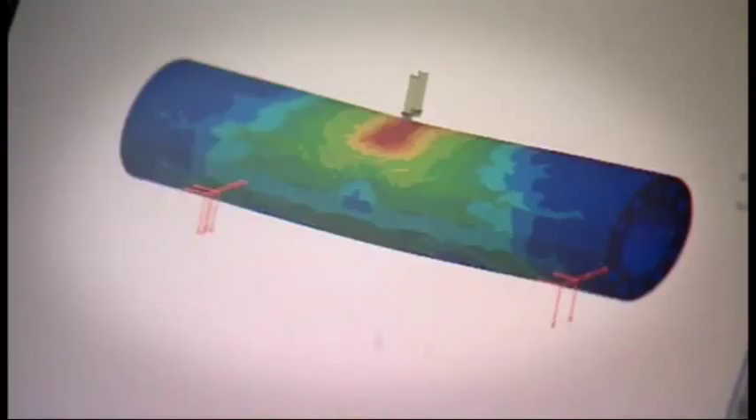It must take a lot of people to plan something like that. Yes, a team made up of industrial, mechanical, and chemical engineers, a city planner, and interior design experts ensure that all components of the building's specifications are met.

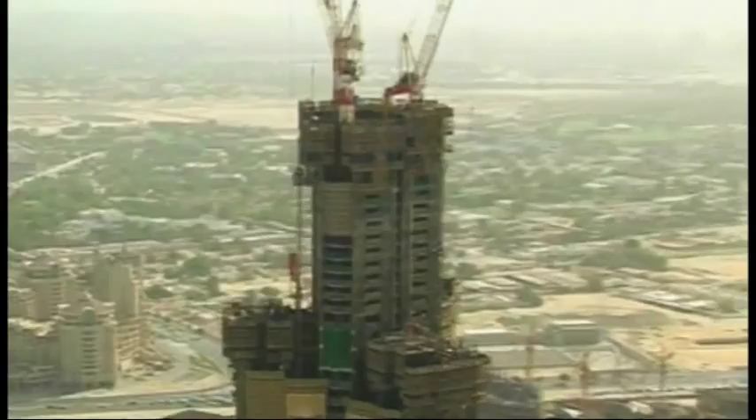In an attempt to bring a new image to the Middle East, planners are creating space and living for 10 million inhabitants. Along a stretch of 7 kilometers, 140 skyscrapers are being built, each one taller than 300 meters. The center of attention in this extravagant plan is a massive skyscraper, the Burj Dubai. Is it the tallest in the world? Yes, it stands 800 meters tall.

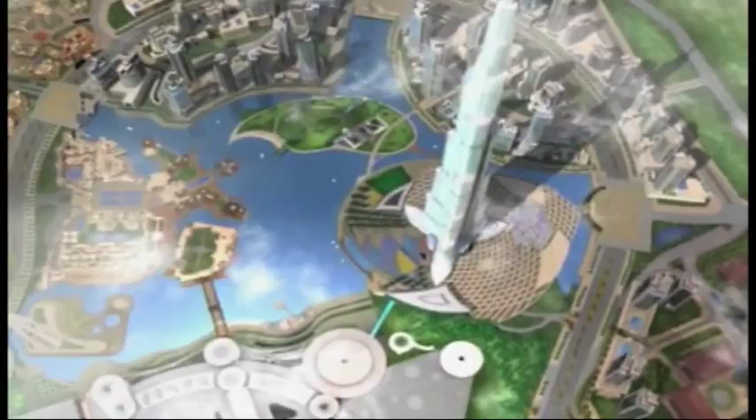And surrounding it is a whole new district with offices, parks, an artificial lake, and 320,000 luxury apartments. There's even an old town quarter embodying traditional Islamic architecture. The goal is to transform Dubai into a service and tourism-oriented city.

Crowned the tallest building with the highest roof, antenna, and inhabited space in the world, the Burj Dubai is the outstanding landmark of the new district. A symbol of architectural excellence.

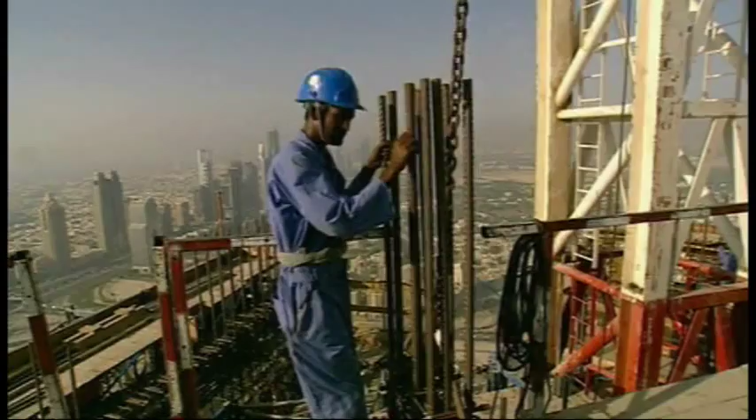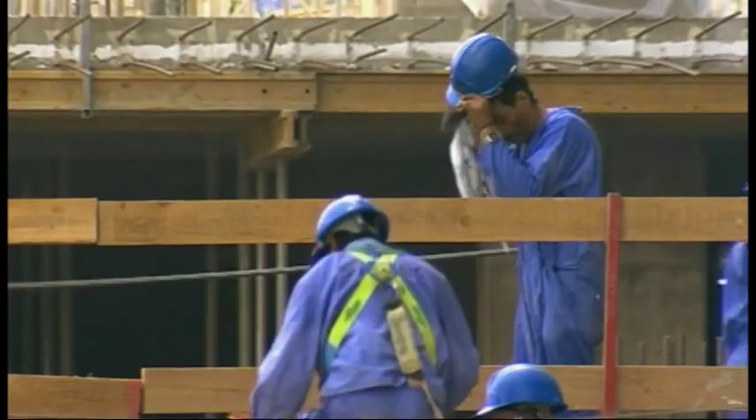The crews working on the towering structure are pioneers in the construction industry. A 3,000-strong labor force from Pakistan, India, and Bangladesh work around the clock in 10-hour shifts. The high temperatures, along with up to 90% humidity, are tough even for those used to working in such harsh conditions. The entire downtown project surrounding the Burj employs some 25,000 workers on the biggest construction site in the world. A quarter of the world's cranes are used.

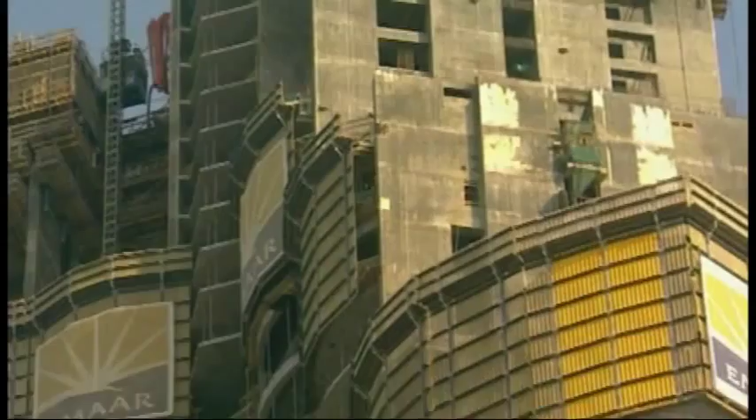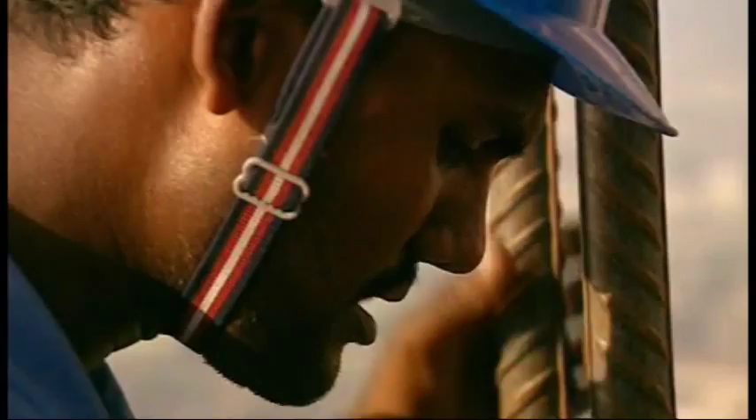2/3 of the Burj Dubai is constructed from reinforced concrete, and never before has so much steel been used on such a small architectural footprint. The steel elements, powerful as they are, are sealed completely by concrete to guarantee that no air or water comes in contact, and the steel must be protected by concrete in case of fire. The high temperatures must have made it difficult. Yes, the daytime heat left them no choice but to pour cement at night.

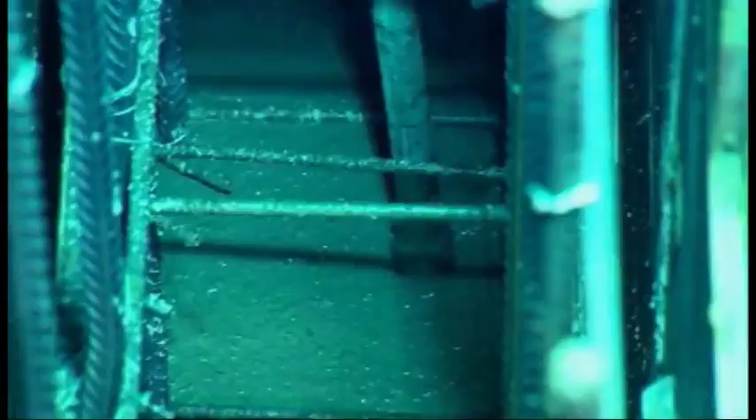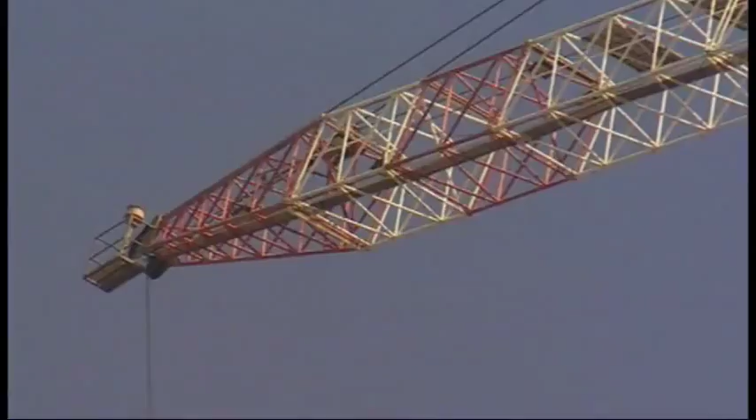In the daytime, imported massive cranes hauled up tons of materials. We have 3 big construction cranes up here. There's 1, 2, and the one behind is 3. These are the biggest construction cranes in the world. One actually came off Petronas Towers in Malaysia. These cranes are called self-climbing cranes that actually climb up inside the building.

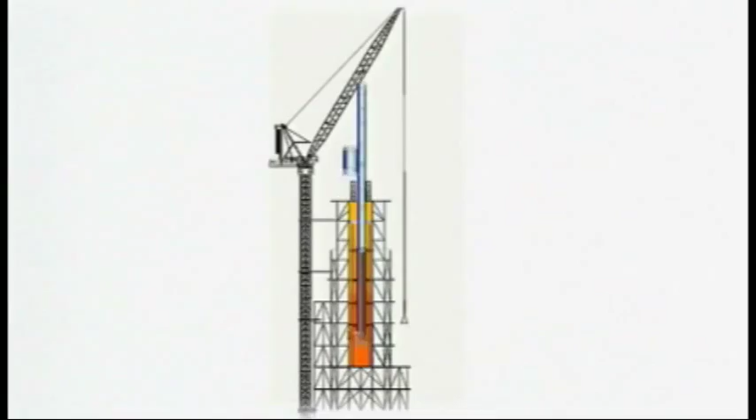These cranes are supported off the walls downstairs at 2 locations with big beams. So what they do is they put a 3rd level of beam here, so it's supported on 3 beams. Then the bottom beam gets loosened, so it's supported on the top 2. And then the crane jacks itself up. It has a big hydraulic jack in the bottom of the crane that goes up like this. And it catches and goes up again, 1, 2, 1, 2, like this. So in 24 hours, we can jump this crane about 20 meters. In the end, 1 crane was left to mount the 200-meter spire that crowns the Burj Dubai.

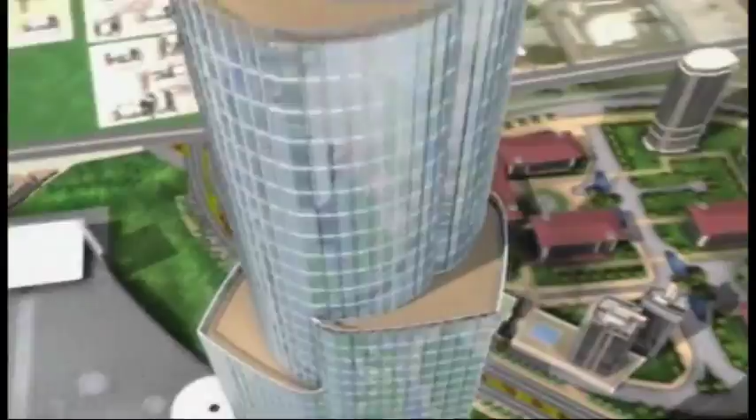For a building of this magnitude, extensive maintenance planning was necessary for managing power, climatization, and water. Every material distributed throughout the building was pumped or driven upwards against the force of gravity. A multitude of pumps, pipes, generators, and distributors service the entire building. Every 20th level is reserved for these logistics. These floors have much higher ceilings in order to house all of the equipment.

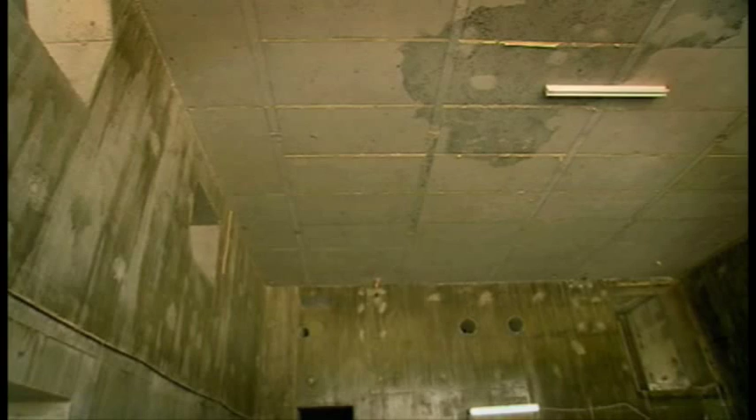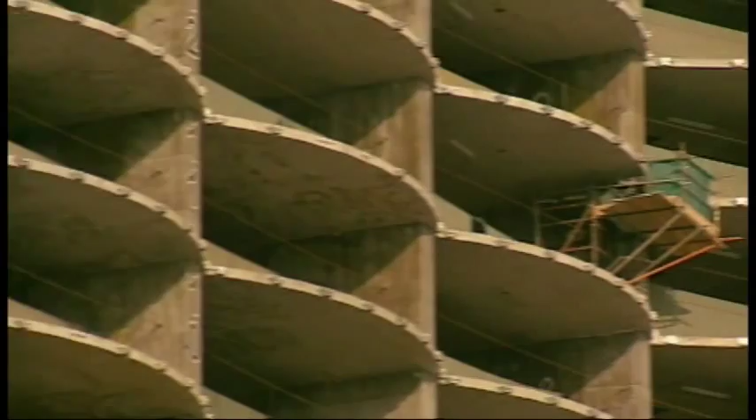For developers, the biggest concern is climatization. A common problem in skyscrapers is that some rooms can be flooded by too much sunlight, causing them to heat up. The cost and energy used to cool a building of this magnitude is huge, as the hot desert sun can produce temperatures of up to 50 degrees Celsius, or over 120 degrees Fahrenheit.

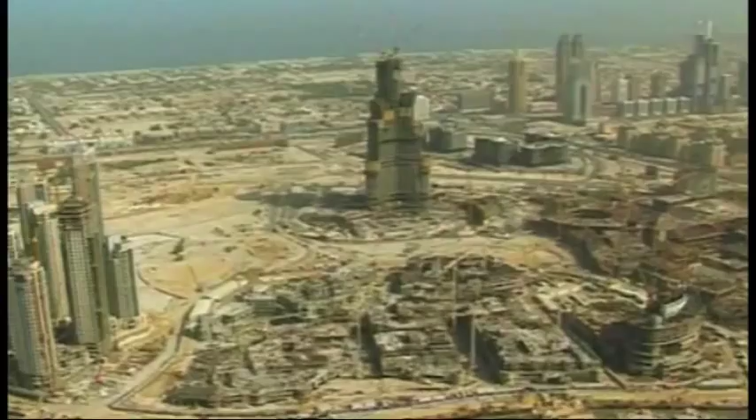Do they try to make them energy efficient? Yes, Ken Yeang, a London-based architect who designs bioclimatic buildings, is having major success in Asia. His focus is on the sustainable or green skyscraper. Bioclimatic basically means designing with the climate of the place to lead to a low energy building. And so essentially the objective is low energy, but it has to respond to the climate of the location. Once you apply the principles to the skyscraper built form, then the built form has to respond to the climate, to the sun, to the wind, to the rain, to the seasons of the year.

Using natural resources, Ken Yeang has developed groundbreaking techniques in an attempt to make skyscraper life more eco-friendly. Using rainwater, he creates falls of fine water mist inside the building. A vertical landscape comprises several levels of extensive gardens. And for natural cooling, the wind is harnessed to replace conventional air conditioning systems whenever possible. Openings on the facade edges allow wind into the building, where it's directed through atriums, light yards, and balconies.

They're making a constant supply of fresh air. Yes, and an individual concept is drafted for each project's unique local climate conditions. They work with recyclable materials that combine maximum strength and durability.

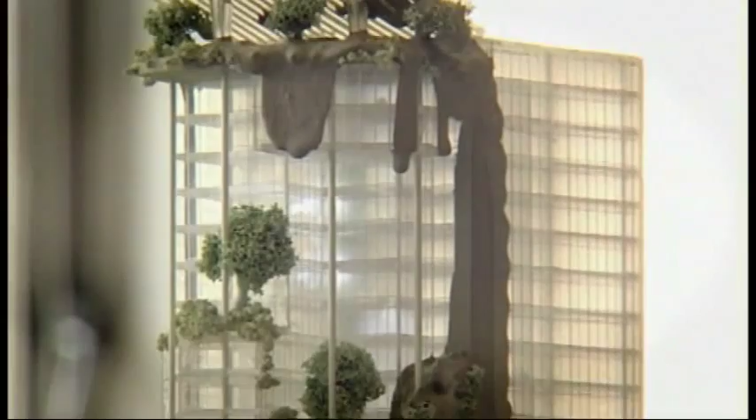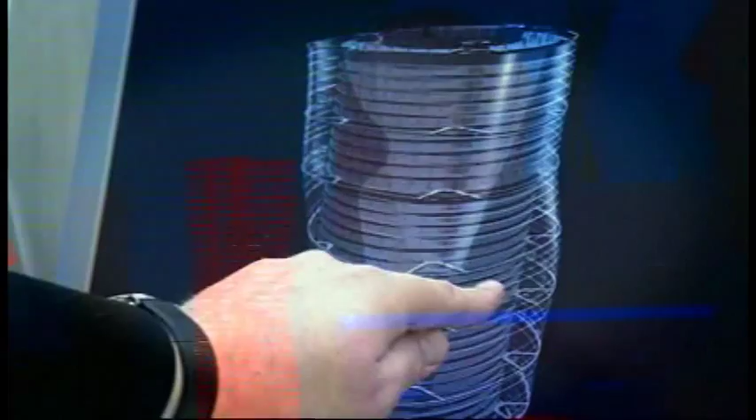These architects are developing a design to work with nature in the form of a bionic skyscraper. It will incorporate a feature known as an adaptive facade. Climate-adaptive facades differ from conventional ones in that they are able to adjust their characteristics to the changing environment, therefore maintaining a comfortable indoor temperature, lighting level, and air quality without excess use of energy.

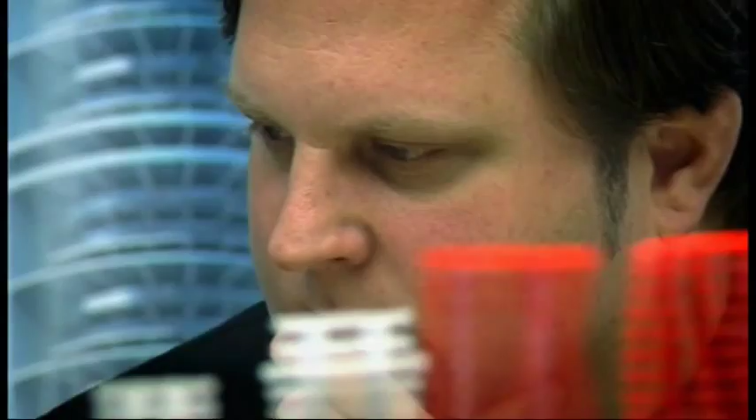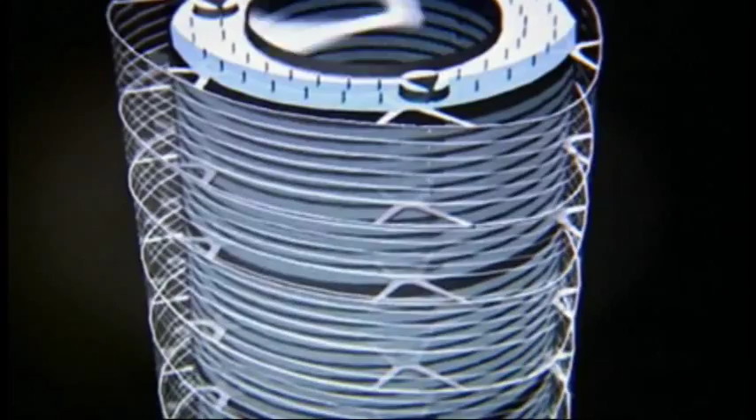In nature, skin is an example of a multitasking organ. It protects against moisture while allowing air to permeate. The design goal is to create a breathing building that can adapt to the environment like a living being. By cladding shape memory alloys, the facades can change their form and flexibility through electro-impulses as needed to maintain environmental and structural stability. Will this help keep skyscrapers from swaying in the wind?

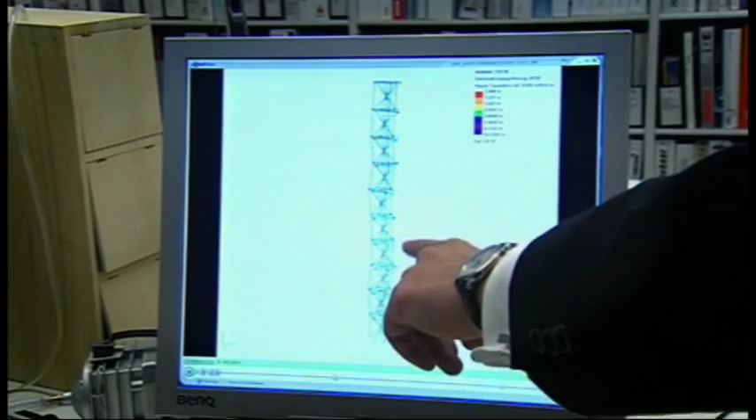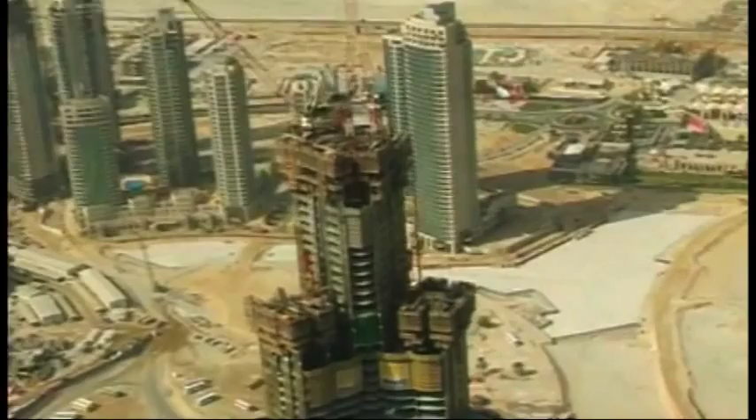Yes, an adaptable structural frame may counterbalance the sway effect on the top floors if the lower areas are able to actively alter their form. At over 800 meters tall, there is some expected sway on the Burj Dubai. Chief Structural Engineer Angus McFarlane planned for winds that have the potential to exert 2.5 tons of pressure per square meter on the building.

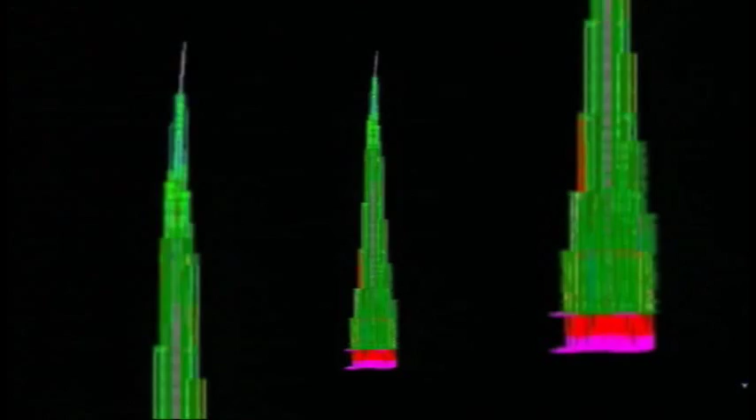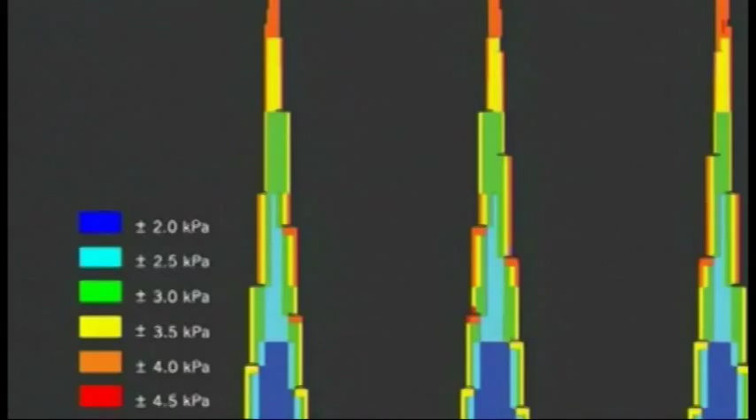Wind is still a problem because it's a predominant load, but the building, as you've seen out there, has facets. This disrupts the wind force. There's a thing called vortex shedding, and little vortices come off the building, and they come off at a frequency, and this can accentuate the wind loading. Whereas in this building, because of the faceted, stepped shape of it, it disrupts the vortex shedding and reduces the wind load to a minimum.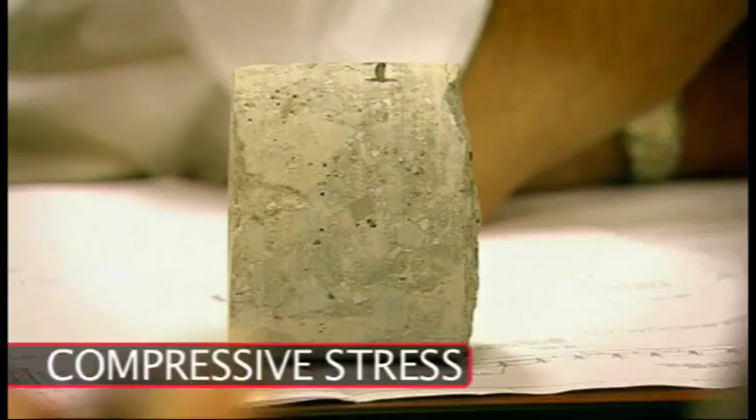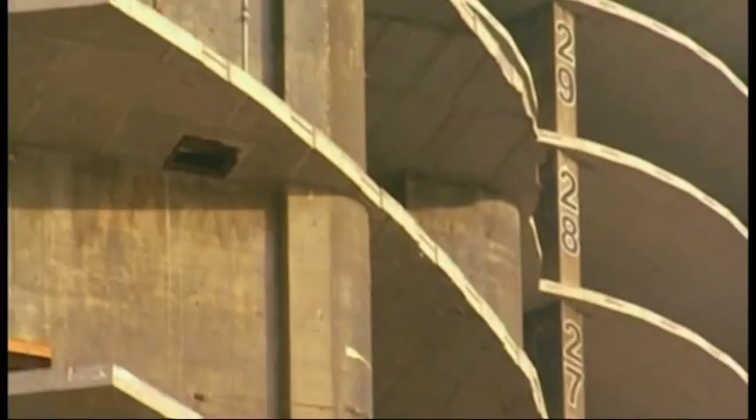Aside from the wind, the engineers also focused their attention on the downward compressive stress on the supporting walls. They used a new kind of special concrete that can withstand 500,000 tons. Well, the concrete is very difficult on a project like this. The whole structure is reinforced concrete, and it's very high strength concrete. It's actually 100 newtons per millimeter squared, which even in Europe and America is difficult to achieve.

So here in the Emirates, this project and also the airport project, which is now ongoing, were the first projects to have specified 100 Newton concrete. Very strong concrete. And to achieve that, you need very careful design of the concrete mix. You have to have good materials. You have to have very good cement, fresh cement, aggregates from the mountains here. And you have to have special chemicals like retarders and superplasticizers to make the whole thing work.

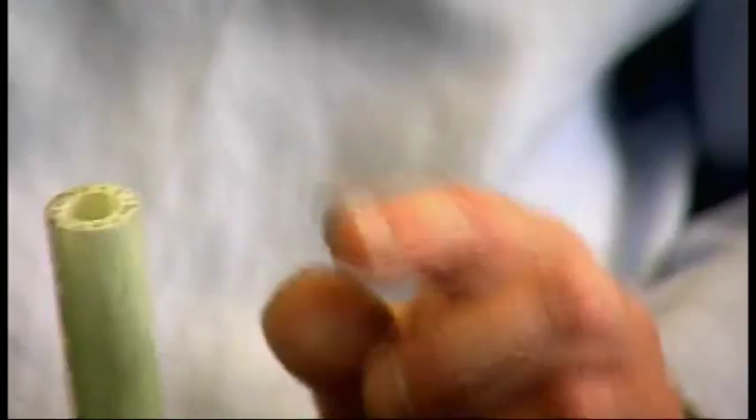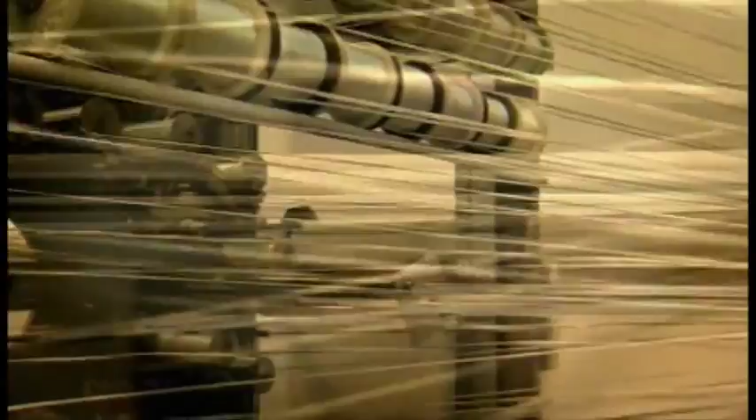In future construction, elements won't be cast, rolled, or forged as much. They will be woven. Researchers are developing a material which is lightweight, yet as durable and flexible as steel. Again, nature is the model for this synthetic plant stalk. Looking for an ingenious combination of strength and flexibility, this weaving machine integrates hundreds of meters of synthetic fibers, which will take the place of steel.

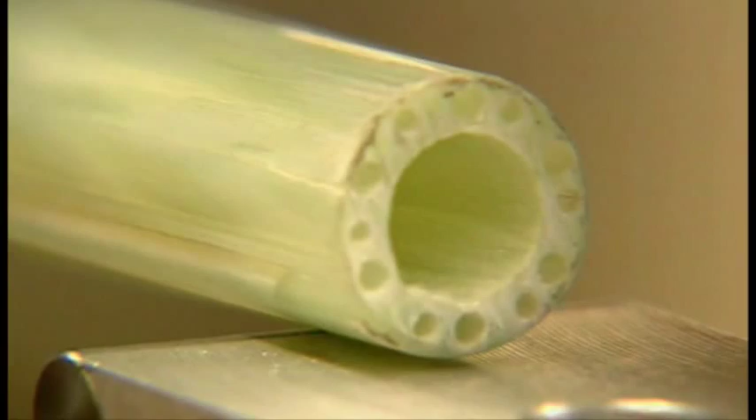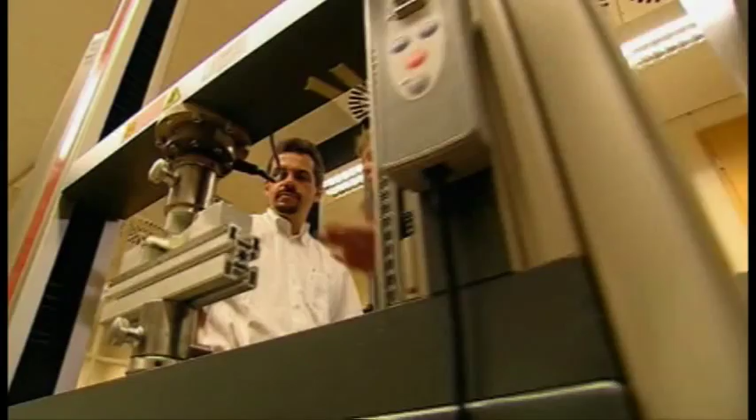This is a three-point bending test to determine the limits of the material. The stalk has a tensile strength limit of 15 kilonewtons, or 1.5 tons. A steel-reinforced structure would have already failed. Every material has its limits. However, this new material has a greater ductility at its breaking point in that it does not suddenly split or tear. Do they test how the weather will affect it? Yes, in this specially designed chamber, they will simulate the effects of how heat, cold, and intense UV light would affect the material over a 30-year period.

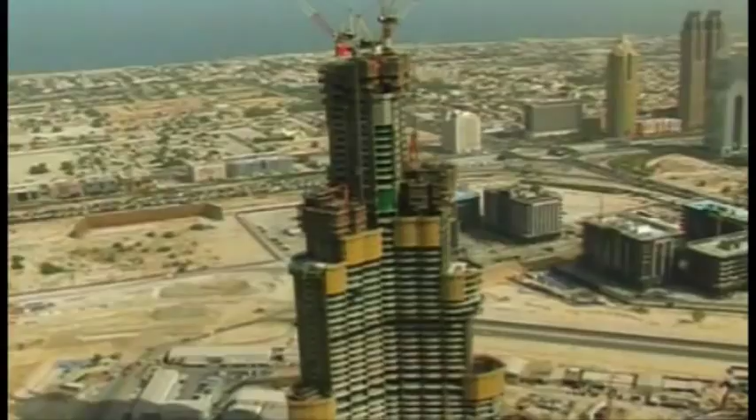The Burj Dubai will include 3,000 residential apartments, office space, and several hotels featuring the Armani, the flagship for a new international chain. What skyscrapers are going up in other parts of the world? In London, skyscrapers are mostly confined to Canary Wharf to preserve the city's historical skyline. Now, Sir Norman Foster's 180-meter Gherkin rises in grandiose fashion. Other new projects, such as Bishopsgate Tower and the Shard London Bridge, will change the London skyline.

Kuwait, another country building a whole city, the City of Silk, will showcase a tower reaching 1,001 meters high. This skyscraper will cost $100 billion to construct, and the estimated completion date of the city is 2030. This skyscraper, which is named 1001 Nights after the book of collected Arabian stories, is to be a symbol of peaceful coexistence between all cultures, as it will have 3 spires including a mosque, a synagogue, and a cathedral. This sprawling City of Silk will be home to 750,000 people. 100,000 will be provided space for living, working, and recreation in the 1001 Nights.

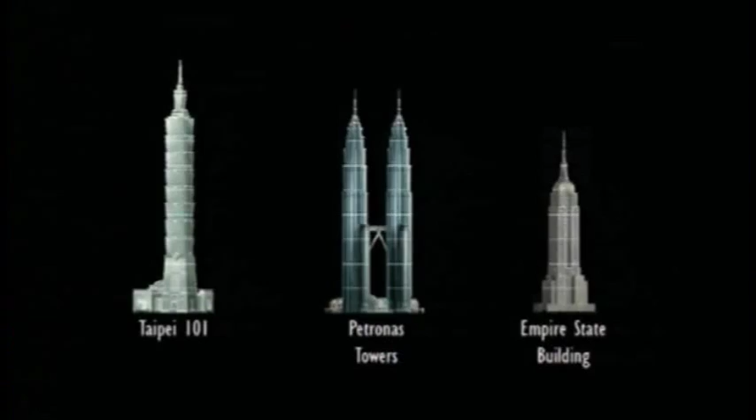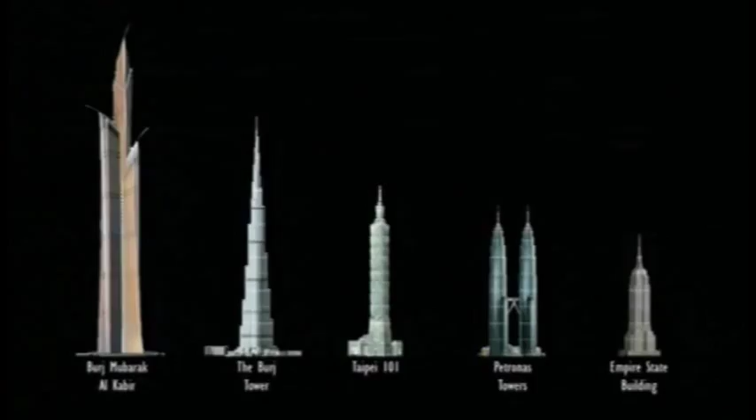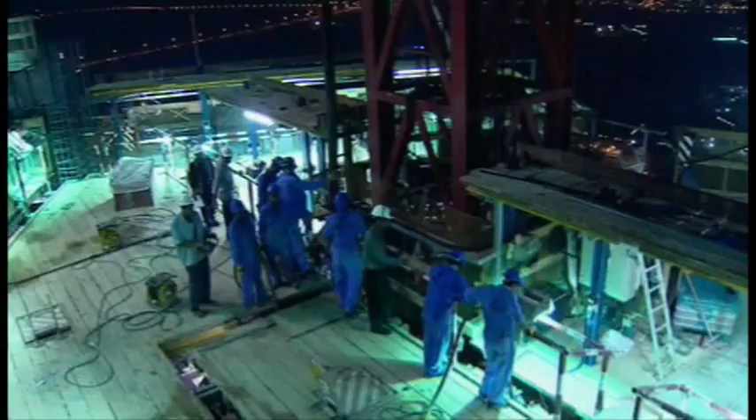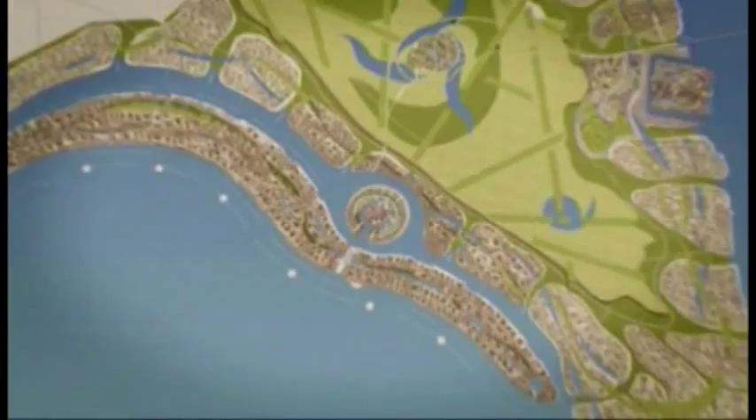Here is a basic comparison of the heights of some well-known skyscrapers around the world. As the Burj Dubai is nearly 2 times taller than the Empire State Building, 1001 Nights dwarfs them all. Between planning, raising funds, and construction, there is extensive work to be done. As crews work diligently around the clock, somewhere else, the next team is planning a taller, more complex skyscraper. Persian Gulf countries are attempting to diversify their petroleum-centric economy to multi-use and multicultural-driven centers. They are shaping a new identity. In the future, architects and engineers will work together to advance the stability, efficiency, and technology of skyscraper construction.

Skyscraper is such a 20th century name. We need a new name for a new century. And so we suggest Star Catchers is a little bit better. You know, there's this fabulous quotation out of Edward Young's Night Thoughts that is one of the most endearing quotes that I've ever heard. What he said was, "Too low they build who build beneath the stars." And I think today when we're talking about buildings of a kilometer in height, we're reaching for the stars, not just the sky. And something for the 21st century that represents the desire to uplift the human spirit higher than it's ever been done before. That's what these buildings are symbols of.